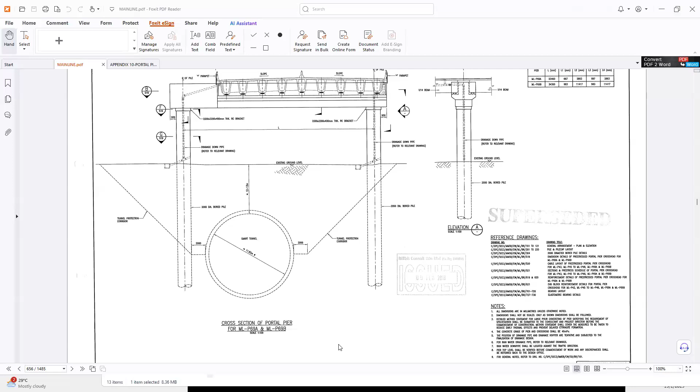I just want to share my screen. Is my screen visible to everyone? Yes, yes. Okay, nothing to talk about me. Everything was explained by Dr. Krishna, and Janarul is one of my best friends. He invited me to share some real-time industrial problems, whatever we do in the design, and my experience with all of you.

So I just want to start. Mainly, my scope of work is bridge design from top to bottom, meaning superstructures, substructures, and foundation. My talk today is not limited to only foundation, because I am a structural engineer. Geotechnical engineers do the soil analysis, give the soil parameters, and also do the pile design up to that. From above, meaning pile cap, substructure and all superstructure components, is done by structural engineers, me and my team.

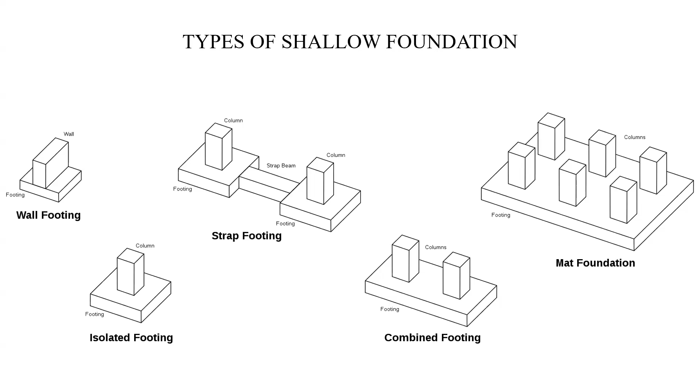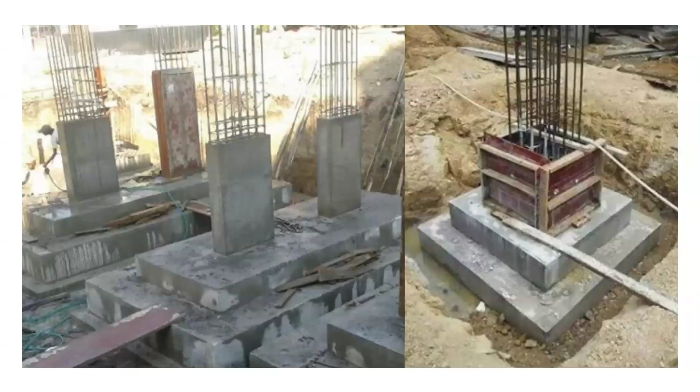But for the main structure, which bears the load from the vehicles and the bridge, mostly they go for deep foundation, mainly pile foundation, well foundation, or like that. I can't say this is less used. This is used mainly for buildings, and all those types of structures use this type of shallow foundation. This is a typical foundation. This is an example of combined footing, and on this side, isolated footing also.

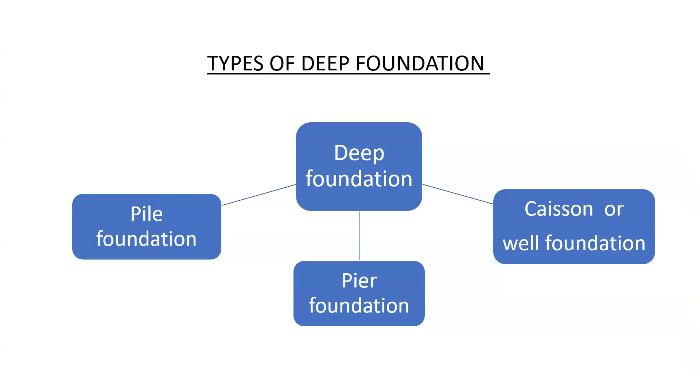So as I said, in deep foundation there are a few types: pier foundation, pile foundation, and well foundation also. This is mainly a well foundation on-site photo. The well foundation is mainly for long span bridges. Long span means nearly more than 100 meters; we consider that a long span bridge. In that type of bridge, when the pier carries a huge load, and also when the pier is in a water body, mainly a river or something like that, the well foundation is the preferable choice.

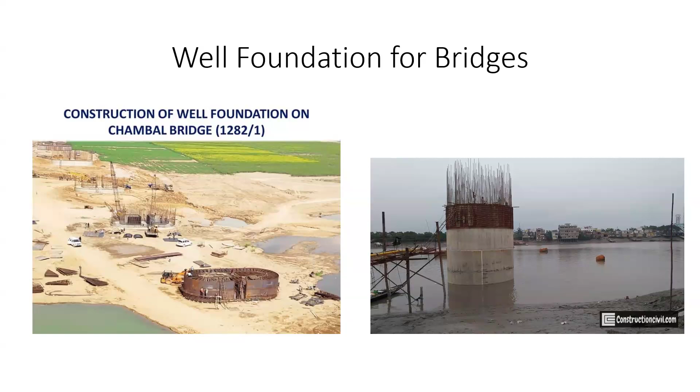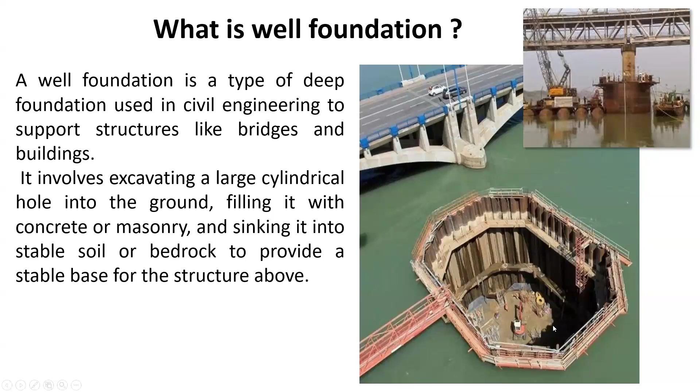This is one construction site photo of a well foundation. This is the top view from a water body. By the sheet pile, we protect the site from the water coming into it, so we can start work inside that area, preparing the site for starting the well foundation. This is the well foundation, the curb portion, which goes slowly deep into the soil. I go to the next slide.

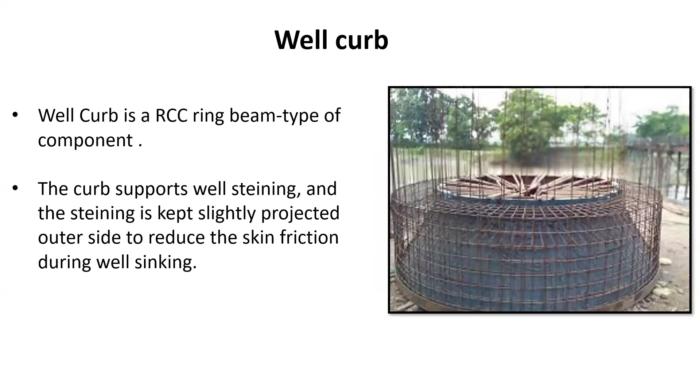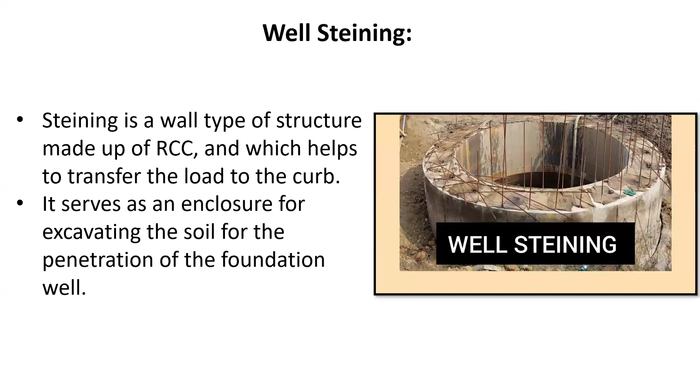Yeah, the bottom plug. This procedure keeps on repeating so that it goes to enough depth for the foundation. This well foundation easily goes 30 meters and more deep into the river. It is mainly on the water side, where we can't do the piling work, so we choose this well foundation. This is the casting of the bottom plug. When it goes down to the desired design depth, then we seal the bottom portion and then fill it up.

This type of well foundation is very costly, and only if it is very much required do we go for it. In my 15 years career, I have seen this well foundation only one or two times, because it is very costly. If it is a fast running water body and we cannot stop that water, only there do we prefer this type of foundation. Compared to the pile foundation it is costlier, so every contractor and everybody tries to avoid it; only for very big, long span bridges is this foundation used.

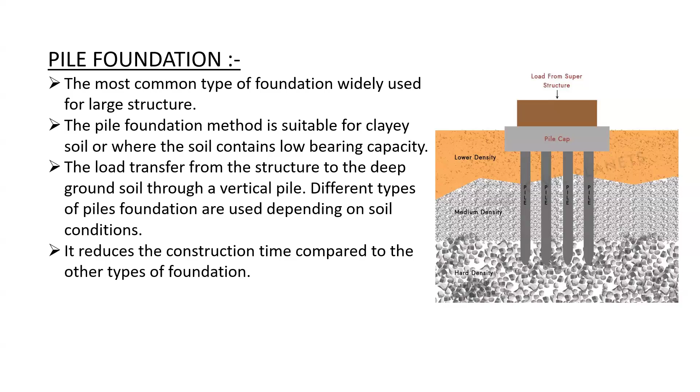Pile foundations come into play for high tension towers and other high rise structures which cannot be supported by open or shallow foundations. Pile foundation is the preferable option there. For electrical towers, they have uplift piles specially built and designed to take tension.

Pile is mainly of two types in terms of construction: bore pile and hammer driven pile. Bore pile can use various diameters, like 1 meter, 1.2 meter, but hammer driven pile diameter is less, nearly 400 to 500 diameter.

Pile foundation gives the structure capacity to take load. The pile transfers load to the ground by two methods: end bearing and friction. According to how much load is coming on the foundation, that determines how deep the pile goes. In some live projects we see pile lengths up to 23, 30 meters, which is quite common and works well at the site.

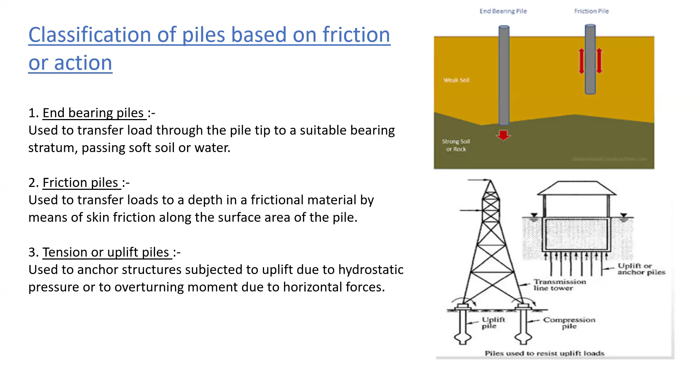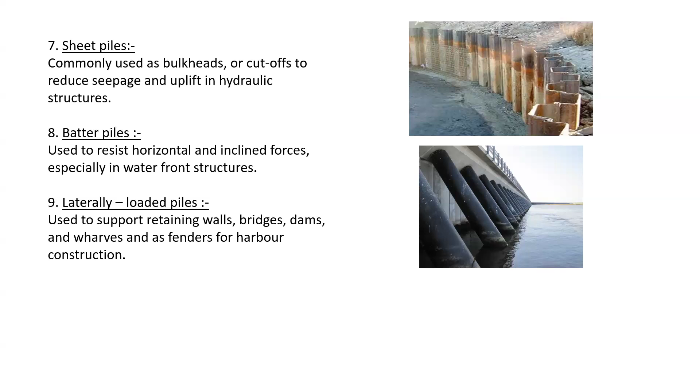There are also material-wise piles: timber piles and steel piles, though these are less used for main structures. Timber pile is quite common in soil improvement cases, slope stability, and ground work, and for ground protection. Some load bearing temporary structures also use timber pile, but infrastructure like bridges, metro, and railway always rely on concrete piles.

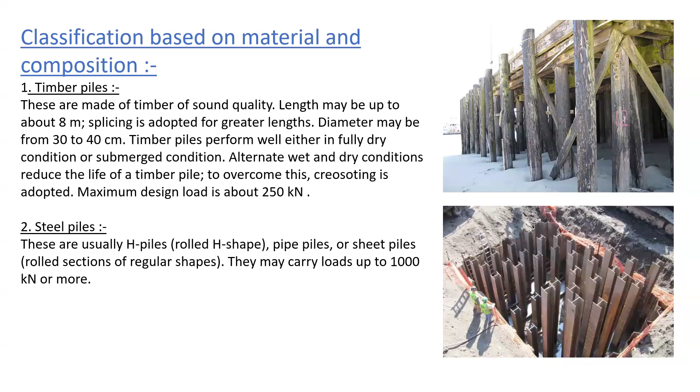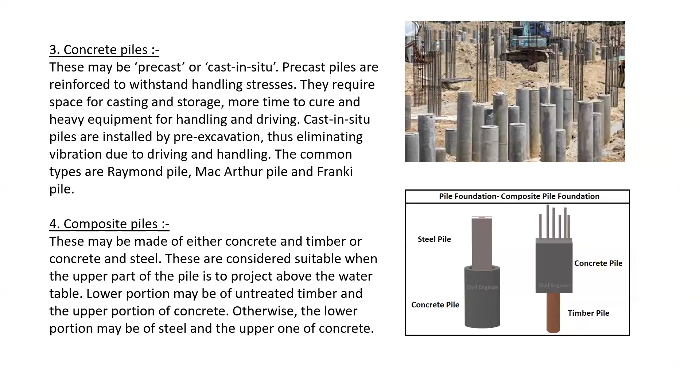Piling is done either by driven pile or cast-in-situ bore pile. In the majority of cases, cast-in-situ bore pile is preferred by contractors and sites. It has advantages: customization of pile diameter and length, and while drilling, it takes soil samples and updates soil parameters, so the geotechnical engineer can check whether the designed pile length is okay or needs modification according to live soil data. This is the most preferable and widely used option for pile foundation.

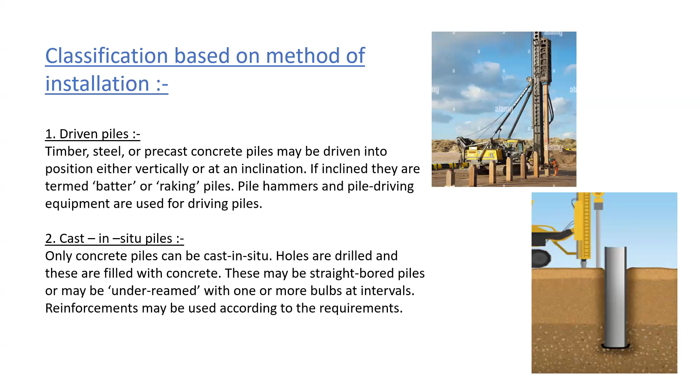Driven pile is also used in parallel, but it has some limitations. This is the typical step-by-step procedure for driven pile.

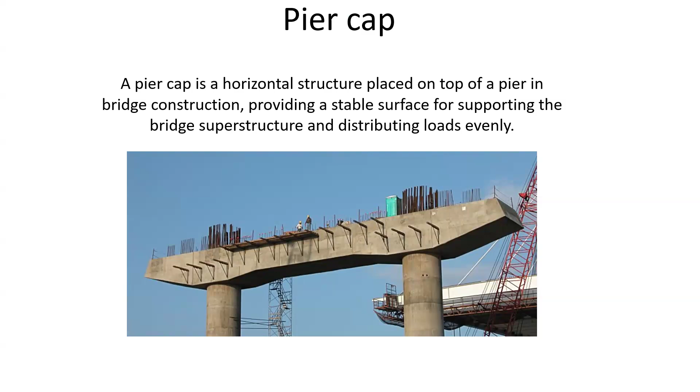This shows a halfway built structure site with pier and pier cap, and the structure ongoing. Now, other than this foundation part, let's move to the bridge part, bridge design, which is my main field of work.

This is a typical structure from top to bottom, taken from one of the metro rail projects, Chennai Metro Rail. At the top there are two U girders supporting the metro rail. Typical U girder span is 25 meters, maximum going up to 28 meters. Nowadays all metros prefer this U girder structure.

These U girders have a few advantages. Each span is built in pieces, two U girders per span, depending on the general arrangement of the metro railway. One span is precast, fully cast and stored at the yard, then brought to site where a crane launches it to complete one span. This is the preferable option for metro railway.

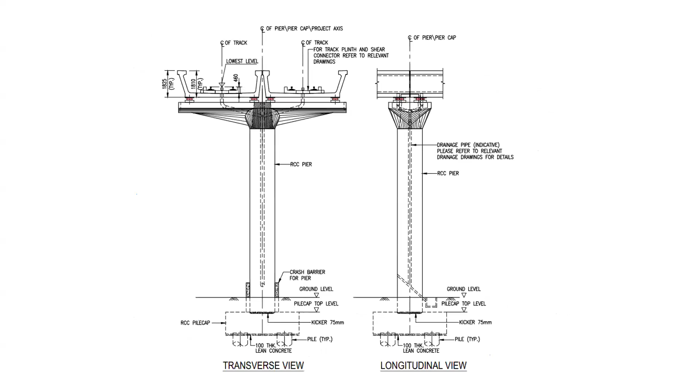This is for the highway bridge. For a highway bridge we cannot use directly the U girder, because as I previously mentioned, U girder is specially favorable and suitable for railway, since railway has one up and one down line with no crisscross requirement - very rarely does a train move from one line to another.

That is what we call crossover, and only that area needs special design. But most metro railway goes parallelly, one up and one down, which is very suitable for this type of girder. But this cannot be used for highway, because highway cars need to move from left to right and right to left, and it needs a flat carriageway.

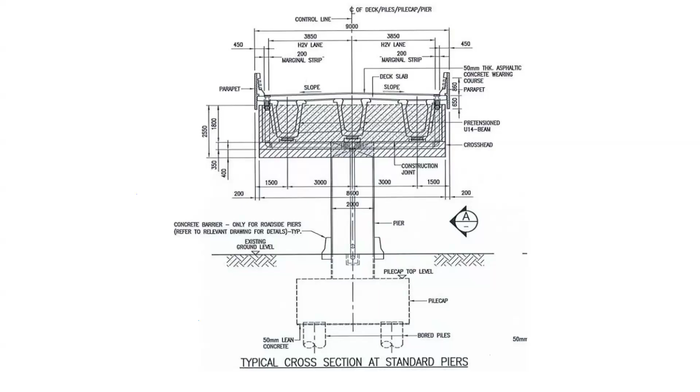In Malaysia, most road highway bridges and elevated expressways use this type of U14 precast beam over slab, and also pile cap and pier, same way, cast at the site. Pier cap is precast, and also the U14 beam is prefabricated precast, which just comes and is launched. Then only the slab needs to be cast at the site.

Some typical highway bridge flyovers are like this, very wide - one lane, there are two lanes for down and two lanes for up, and the total width is nearly 24 meters and above. So this uses a number of U14 beams, but it is still on a single pier. But the pier cap is so wide it cannot be precast in a single piece.

So that time they have to prefer the segmental approach. Here it is 5 segments for the pier cap, and then beam and slab. This type of design is very iconic, because a single pier supporting such a wide bridge is really, really very rare.

Okay, other than the conventional and straightforward design, which is pile foundation, pile cap, pier, pier cap, and all the girders, there is some complication that comes from the site. As designers, we cannot avoid those types of complications - we have to take those complications and give the solution.

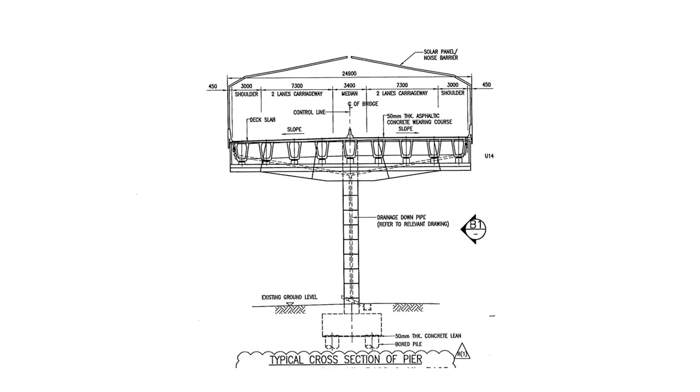So we don't easily go for this complication. Other than the cost of this individual pier, the pier cap also costs extra involving shuttering. These type of structures usually have a number of repetitions, so they construct a mold that can be used multiple times, making construction easier and repetition work faster. But when this type of structure comes into play as a single piece, the mold preparation and design becomes only for one pier, so everything costs high to the project.

This type of difficulty arises because every site doesn't have clear land to put a straight, simple, repetitive design. In a crowded city, when we try to build a new flyover, highway, connecting highway, or metro railway, there will definitely be some obstruction. We have to solve this from a structural and designer's point of view, giving a solution for how they can construct it at the site. So this type of irregular structure comes into play, and we have to encounter it like that.

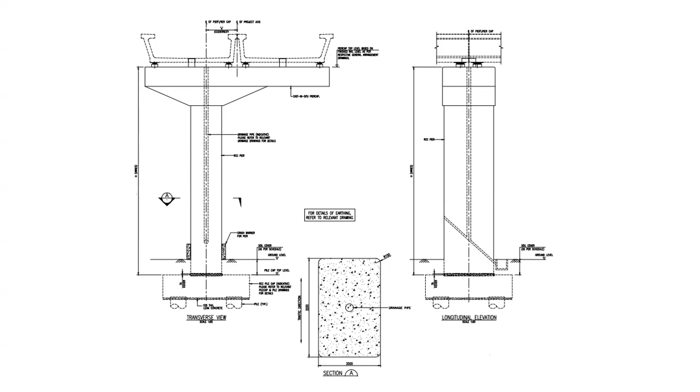This is the simple eccentric pier. Next, this one is for the metro railway. Sometimes it's called an extended pier cap. What is that?

We earlier said the U girder used for railway cannot be longer than 25 meters, or in some cases 28 meters. For each project, they prepare the mold and casting procedure such that the U girder is designed for one optimum length. For some projects that's 25 meters, for others 28 meters, but it's fixed for that project. So all U girders are maximum up to that length. But in some places, the pier cannot be placed within 25 meters - there's a need for an elongated gap, meaning 26 or 27 meters, then again 27 meters, then 25 meters resumes. So for those two spans of 27 meters each, the U girder cannot fit, as the standard maximum length is 25 meters.

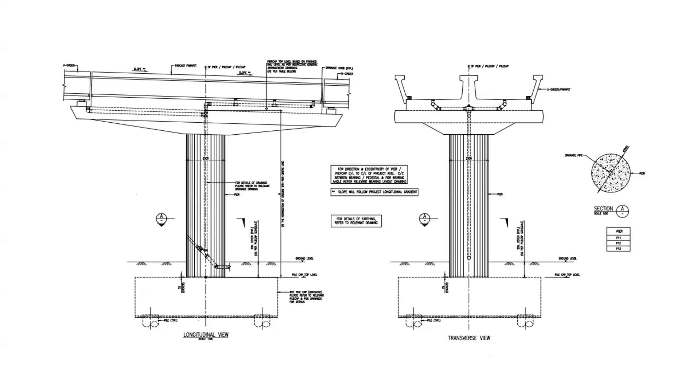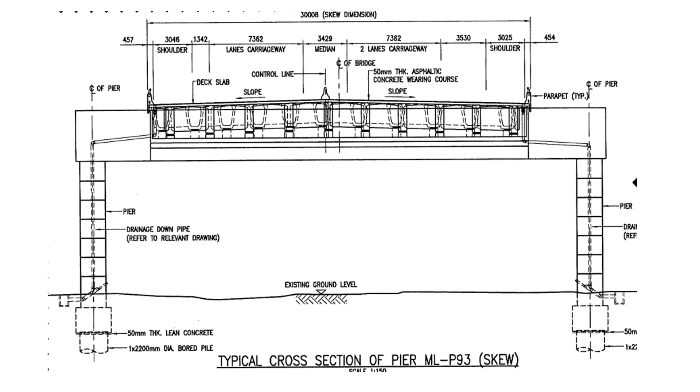Then there's the portal - very common and simple, used when there's no place in the middle of the road to put a pier. This is the most common simple portal, with a portal pier on both sides supported by pile foundation. But even this type of simple portal is not always possible in some complicated and crowded areas where utilities are present, like this.

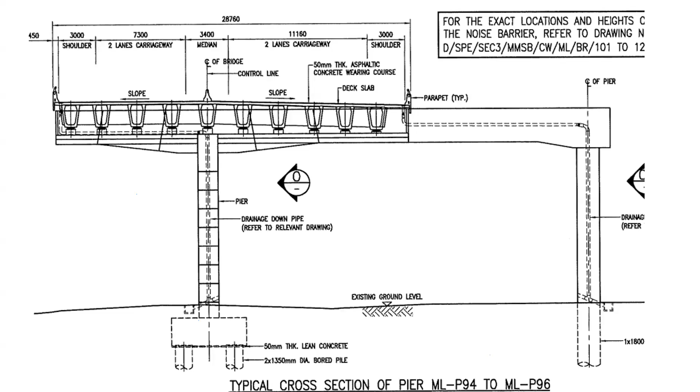Here, at the far end there is only one pile going up to support it, because the far end will have very less load. At the central portion there will be much vertical load, but individually it cannot support this unbalanced load. If it becomes a single pier, there will be huge moment that cannot be supported by a single pier. So the secondary leg that makes it a portal is required, even though it bears very little vertical load. Because of this portal action, the bending moment at the center of the pier is greatly reduced, and that's how we design for unbalanced carriageways with two legs. This is one type of portal.

This is also, you can say, a portal, but the thing is that there is one central carriageway which can be borne by the single pier, but there is another ramp coming, and that is not at the same level, because as we design for the highway, there is also a level requirement. If it is going down or going up, we cannot make it the same level as we wish, because some of the roads go slowly down and merge with the at-grade level, and some of the flyovers go up to cross some railway or some other road, then go down.

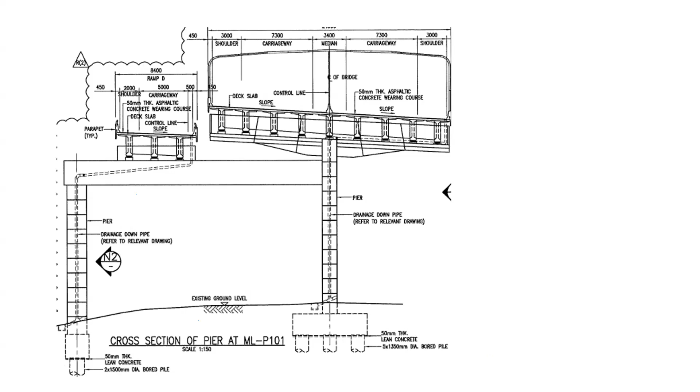So level plays one of the important roles. If the level is not matching, then we have no choice but to build this type of complicated and funny type of structure. But this is the most optimum way. If we try to make the two levels the same, that will be very difficult further along, because one of the carriage ramps is going down and another highway is going up, so we have to maintain the level. So this type of funny structure comes into play in the design.

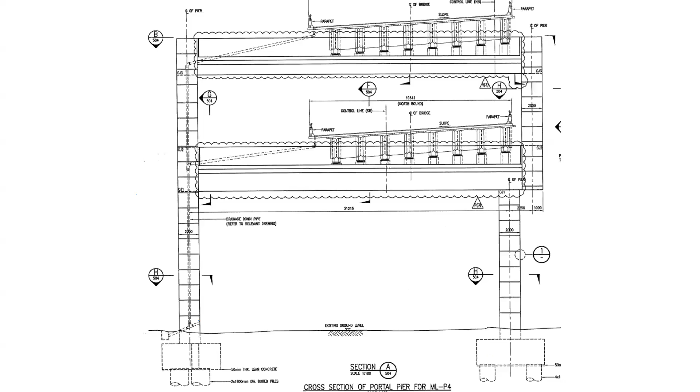This looks like the expected simple way, but still, like the previous one, on the right side there is a requirement that the deck width needs to be so much, so the pier cannot continue from top to bottom; it needs to be shifted by some 2 meters or something like that, which leads to a non-symmetric load distribution. This type of structure comes in some projects, and from our design point of view, whatever moments and loads are coming, we have to satisfy and check the design and provide it for the construction.

Okay, this is also the structure from the construction point of view. This is not all constructed at the site. Some of the requirement is to make it fast, and as said earlier, this type of flyover we don't build at a vacant site. The busiest road of the city needs to be replaced by the new connecting flyover. So the ground is expected not to be empty; it is a busy street or full of utilities. So the construction of the portal cannot be done in such a way that the site will be blocked.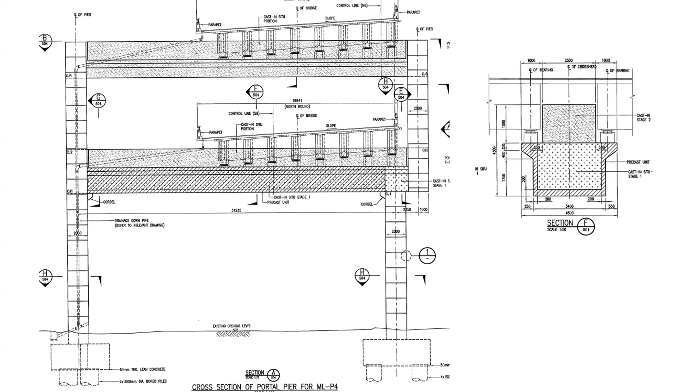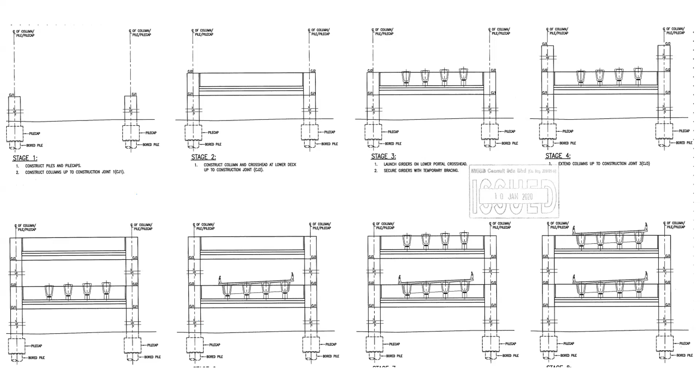So this level of the portal is precast, as seen at section F. You can see the U type portion is precast, brought and put there, then filled up with concrete in a second stage, and a later stage builds the portal pier cap, then the beams are put and the structure continues. This is shown here step by step, how the double deck portal is built. First the pile cap and pier up to the first level, then bring the precast one, put it and cast the filling, then place the beams of the first level, then the column goes up to the second level, then the second level is built, and so on.

Something we have to provide for the contractor: when it is not symmetrical, the first level will be cast with temporary support, and once the first level is completed, then go for the second level. This is stage by stage how the portal is built at the site.

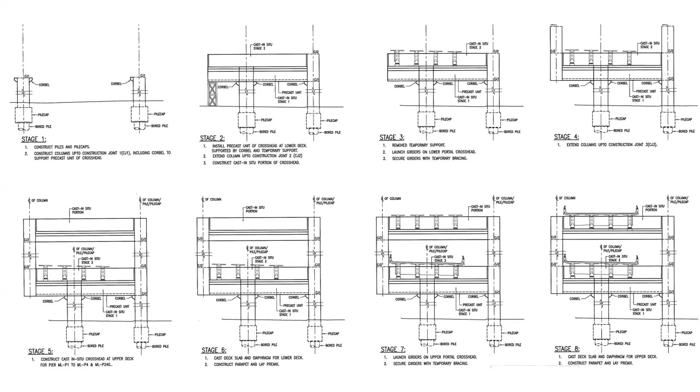Okay, we discussed the various types of portal supported by the pile foundation. Some more complication comes into play when the portal needs to be built over a ground. Under the ground there is a tunnel called the SMART tunnel, which flushes out the rainwater and all those things.

And this tunnel was constructed long before, and we cannot touch the tunnel portion. It comes under the sewage, water supply, drainage authority, and the higher authority wants to build the new flyover exactly where the tunnel is. Below the ground, 12 and 13 meters below, there is the tunnel, and we cannot disturb it because it is functioning for the wastewater. So when we go for the portal and pile option, there is some restriction.

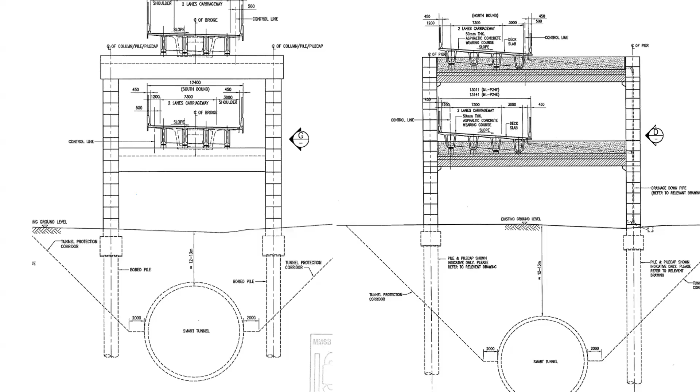Another thing: a double decker structure, but we don't have space for the portal. The top one is supported by two columns side by side, and from the lower level it becomes a single pier option. This option we call a lollipop pier or lollipop structure, which is two levels of roadway supported at the bottom by a single pier.

The same type of structure we tried to build at the side, but some site issues came up, with one highway at the top and one at the bottom, and we cannot place the pier exactly at the center. So at the side one more pier is required, so it becomes a portal. This is one I have seen in Malaysia. In lots of places they use this type of lollipop structure, a two-level flyover but not a portal. At the ground it is a single pier.

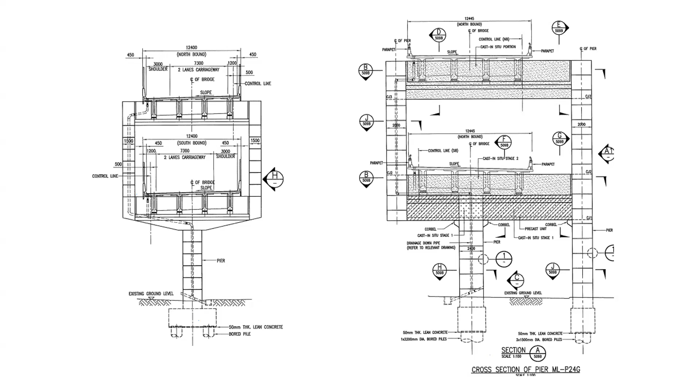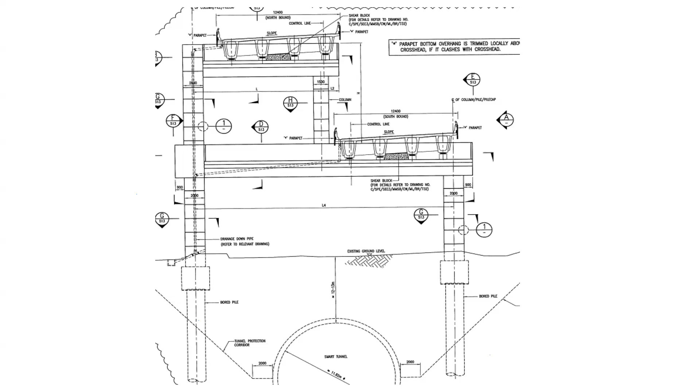This is also at the SMART tunnel area, with two levels of viaduct at different levels. So it's like a small portal over the bigger main portal. This type of structure is built because we cannot easily put one more pier in the middle, since there is the SMART tunnel, so we have to avoid the SMART tunnel area. So the first level pier cap becomes very heavy because at the middle it supports another small pier which supports the upper level of the viaduct.

This is one of the designs I did. You can see there is only one row of piles placed. Don't consider this a single pile. This is the cross section view. There is one row of piles, with 3 or 5 piles, I can't remember exactly. This is the pile center line and pier center line.

There is some difference. There is eccentricity because on this side there is the SMART tunnel and on the other side some electrical or water pipe is coming. So we cannot place the pile exactly at the center of the pier. For this, a huge moment comes when we design the pile cap, because the pile center line and pier center line are not the same line. It looks like a very common, easy structure, but somehow there is some twist.

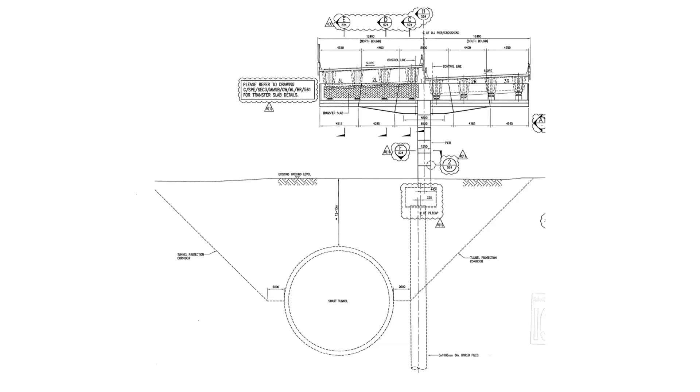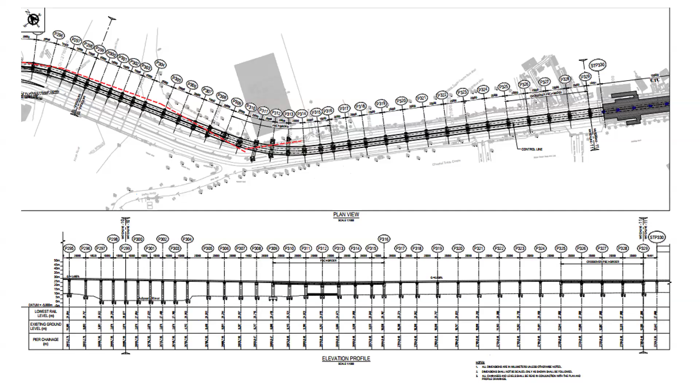It is very challenging to place the pier location, and you get complicated portals with legs not at the middle but in some eccentric way. This is a typical abutment type: when the roadway comes flush to the ground, this type of abutment structure is required, which is supported by one row of piles, and after that the traffic goes to the ground.

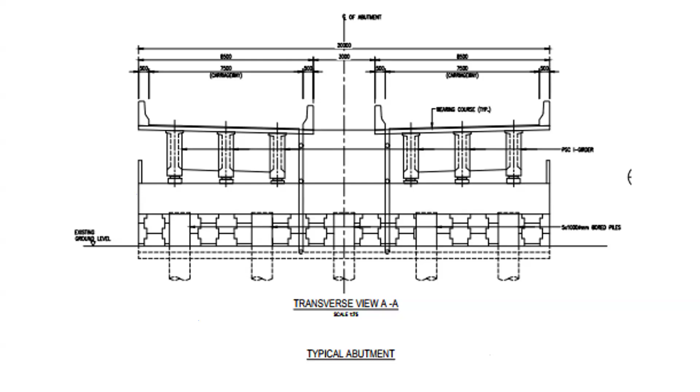This is the transverse view of that abutment. You can see on the left side the bridge beam supporting on the abutment, and loads go to the pile. After that the approach slab and retaining wall, then the fill-up work and ramp, then traffic goes onto the ground.

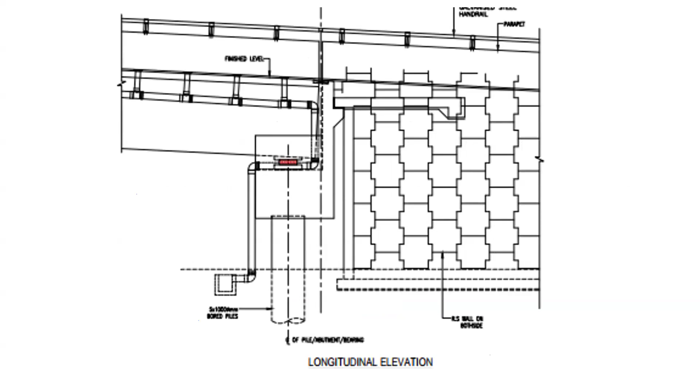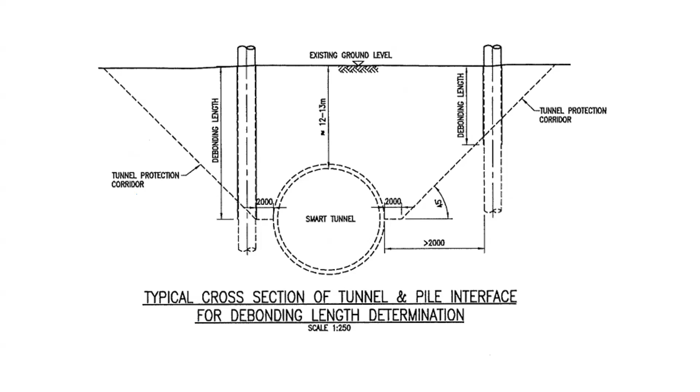This is the typical challenge I told you about, the SMART tunnel. We have to provide a debonding length to the pile, so that the pile does not transfer load to the soil above the SMART tunnel, which load would come back to the tunnel and may disturb it. This type of solution is provided by our geotechnical engineer, so that we satisfy the requirements of the owner of the SMART tunnel, so we are allowed to build around the SMART tunnel without disturbing it, and we can construct the new highway infrastructure.

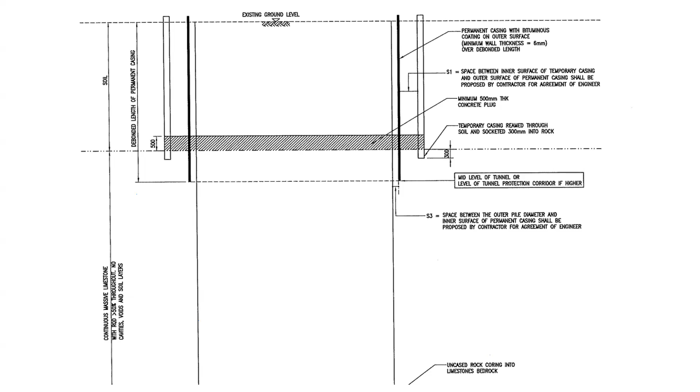This I just discussed about all the above substructures. Now come to the foundation. When I say foundation, two things make up the foundation: pile and pile cap. This is a typical 4 pile, 5 pile or 2 pile cap, very regular shape and size. This is what we ideally design for all the structures.

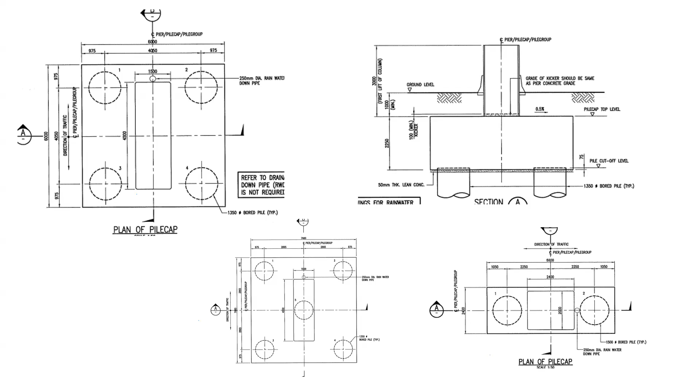First point, our priority will be that every pile and pile cap is regular and evenly distributes all the load coming from the superstructure, substructure, and pier to the pile cap, evenly to all the piles. This is the first choice of a designer for this type of foundation. But the situation, location, some utilities and some congestion at the site force us to go for an asymmetric one.

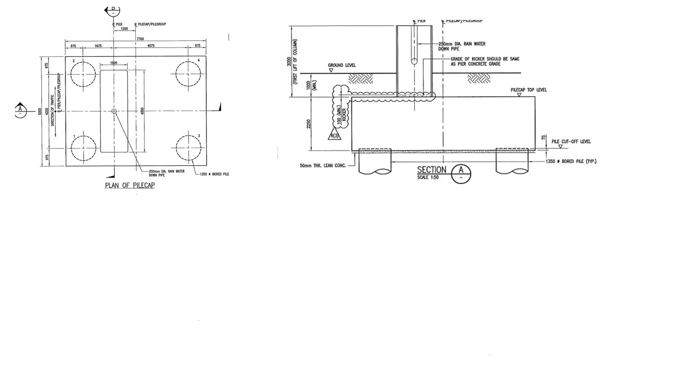First of all, like this, we have 4 piles, but the pier is not at the center. It is towards 2 piles. This will lead to 2 piles being more loaded and the other 2 piles very less loaded. Irregular shape. This is quite common when so many utilities cannot be seen during the survey.

When the contractor comes and tries to dig for the piling, only then they find inside the buried soil there is some water pipe, some high voltage electricity, some cable, optical fiber, something like that. Wastewater drainage and water drainage can easily be found. It is under these, so we can avoid them. But still, in the survey some things get missed, and when we go to the site, we find there is difficulty to do the regular pile cap.

So some of the rectangular 4 pile groups become a rhombus or trapezoid like that. This is the irregular pile group. When this type of pile group comes, checking the pile cap will be very difficult. First of all, the load coming from the pier to the 4 piles is not equal. It has to be calculated with rivet theory, or some geotechnical engineers use Plaxis and other software to calculate the load distribution among the 4 piles.

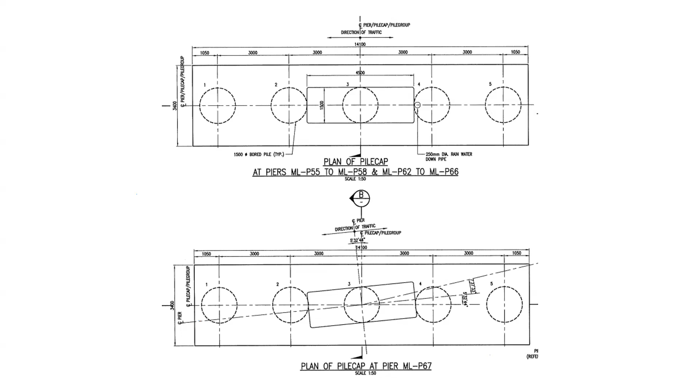You can see the top one is the regular 5 pile group supporting one column. But in the second one, we cannot place the 5 piles on the line of the pier. There is some deviation, some skewness, some angle. So when we calculate from the superstructure load, there will be one longitudinal moment and one transverse moment. All need to be factored with this angle and checked properly, because not all the piles are in the same direction as the traffic. There is some deviation due to site constraints.

Same way, there is something which cannot lead to a regular 5 pile group. This irregularity of this type of pile cap comes to us very frequently when site construction is going on. So with very limited time, we have to check and give a feasible solution for the location. Sometimes it is not for the utility.

At site, while boring the pile halfway, the bore cutter which cuts the soil gets stuck halfway, cannot be moved out, cannot go deeper. In that situation we have no choice other than to leave the pile location. At that time we also go for an alternative pile location to satisfy the foundation.

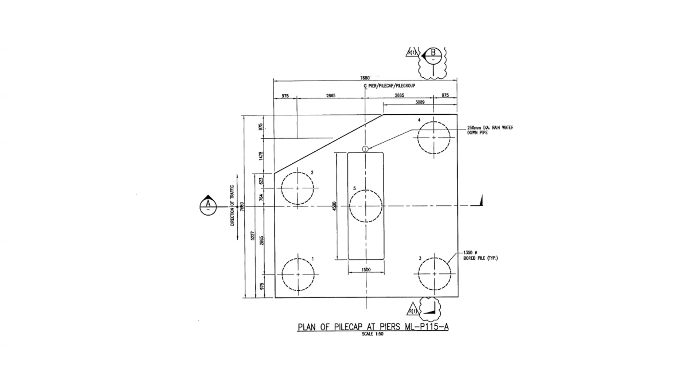Similarly, here we can see there is a pipe which cannot be avoided. So the contractor proposed that the pipe will be inside the pile cap and they can construct it. We checked whether a hollow in the pile cap would be satisfactory or not. We checked and proposed the same way, and they constructed it like that. The pile cap looks quite regular, but inside there is a non-structural pipe, which makes the pile cap hollow, and it should work under the working load.

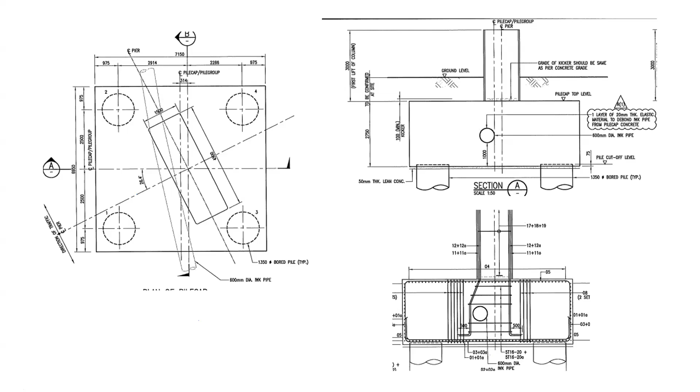This is one of the irregular piles, and this one also. You can see at first there are three piles, but the three-pile spacing is not equal because there is some utility or something there. So this type of uneven distribution leads to some piles having more load and some piles having less load, but for the requirement we have to do it.

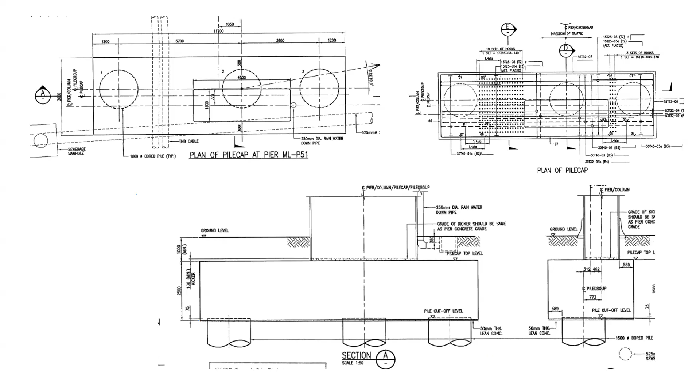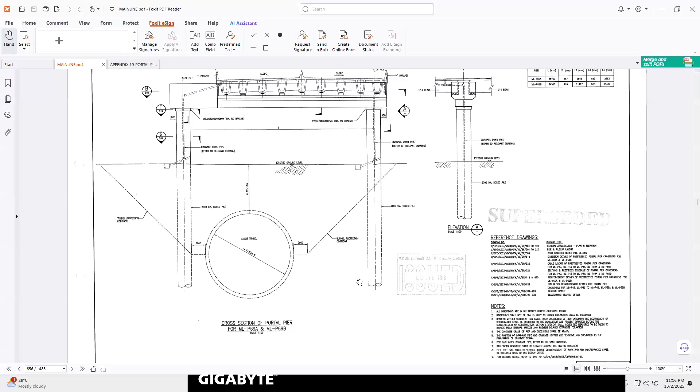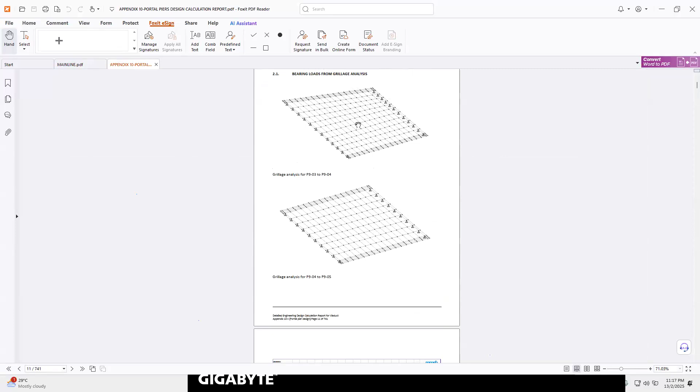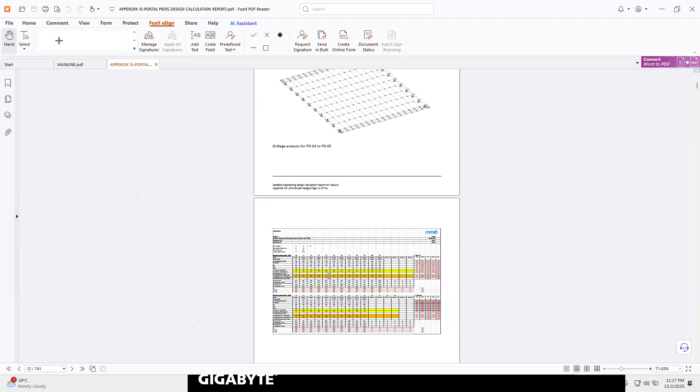Okay, this is how many varieties of structure we have discussed, but how do we calculate? We want to see some of the things. When we design the bridge, the design starts from the grillage of the superstructure, meaning beam, slab and parapet, and above that some traffic load will go on. This type of grillage structure we do in STAAD.Pro, and at the bearing location we put the pin support, and from that, for the superstructure, we calculate the bearing reaction for the dead load, the self weight of the beam and slab together, and

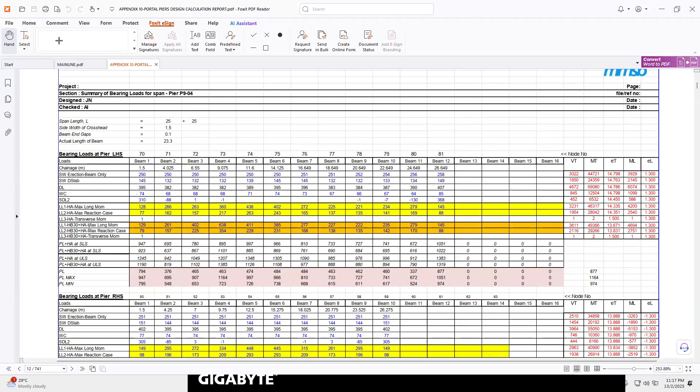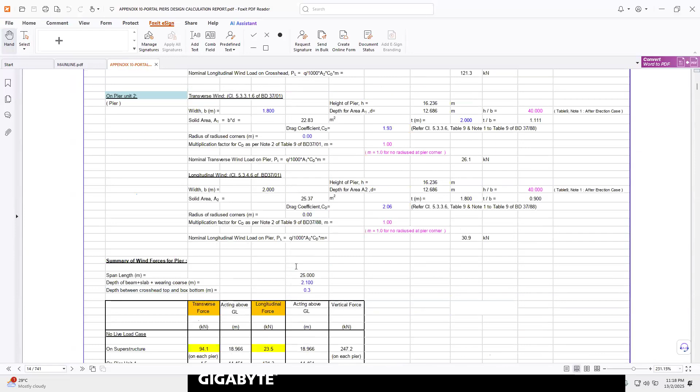SIDL, which is nothing but the wearing course, the layer of bituminous surfacing above the concrete slab, as on any flyover everybody can see, and the parapet weight. This is all SIDL, and then live load. Those are all the bearing reactions from one span on the left side and one span on the right side. This is the bearing reaction we extract from STAAD.Pro. Then another thing, we need to calculate the wind load as per BS, and for all the structure, whatever wind force is acting, we calculate that.

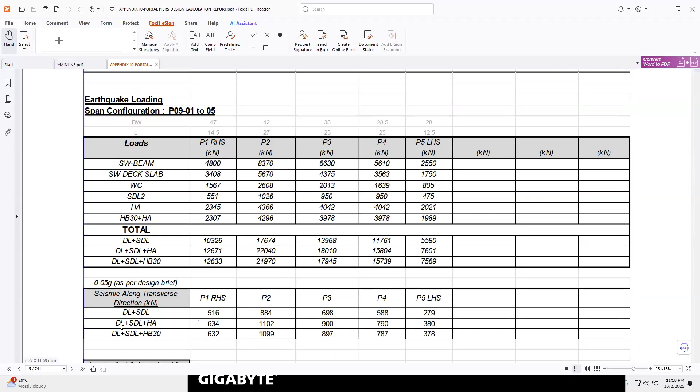And for the seismic, in Malaysia there is quite a straightforward seismic option. There is 0.05g as per design. In India, for this factor we have to do a lot of calculation, and here, with dead load, SIDL and live load with 5%, what the seismic load will be we can easily estimate here.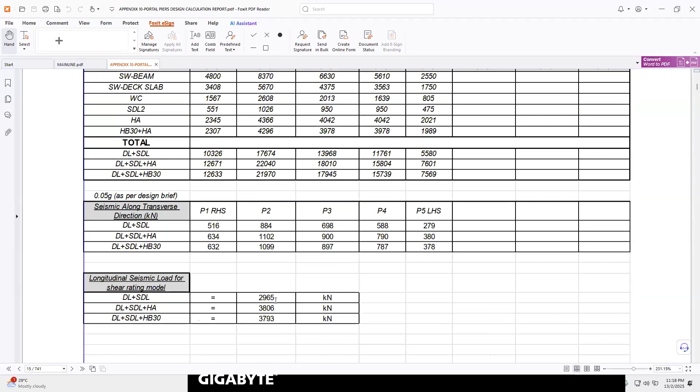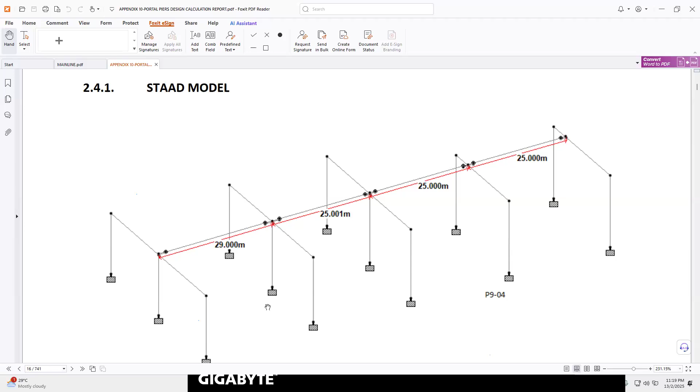And here, in the bridge structure, there is one type of portal, three-legged portal, two-legged portal, in series, connected with the beams from one span to another span. So the longitudinal load, like when a car brakes, this longitudinal braking force comes to the structure; it doesn't only come to a single pier, it will distribute over a few piers. There will be connectivity between one span and another with a link slab, but there will be some movement joints. So from movement joint to movement joint, these longitudinal loads will be distributed. Not only the braking force, but also seismic longitudinal force, longitudinal wind force, creep and shrinkage, all those forces will distribute over a few spans.

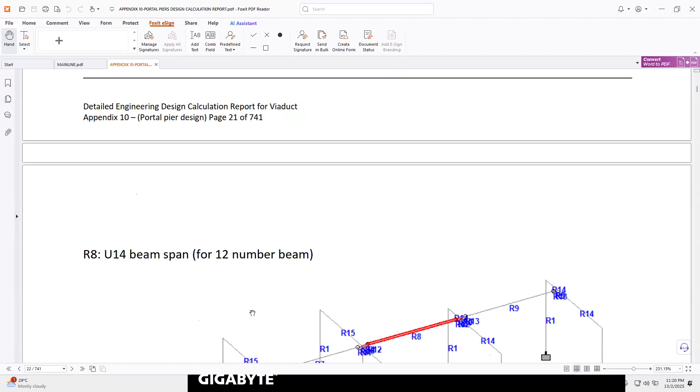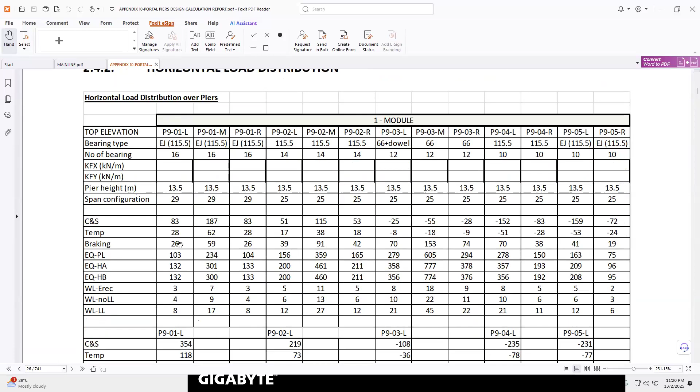For this analysis, this type of model we do in STAAD.Pro, all those longitudinal forces are applied and distributed over the few piers, and the result comes as some horizontal distribution like this. At one of the piers there will be creep and shrinkage, temperature, braking, earthquake with permanent load, earthquake with HA load, HB load, wind load at erection condition, wind load with no live load, and wind load with live load, all distributed over a few piers this way.

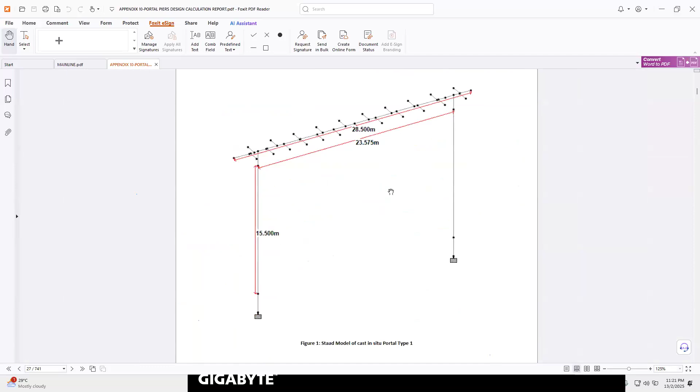After this, the longitudinal force we calculated, as well as the bearing load from the grillage analysis, is applied into the portal model at the bearing locations and the portal is analysed. Then we design the pier crosshead, and from the supports we get the foundation load, how much load will come at one foundation.

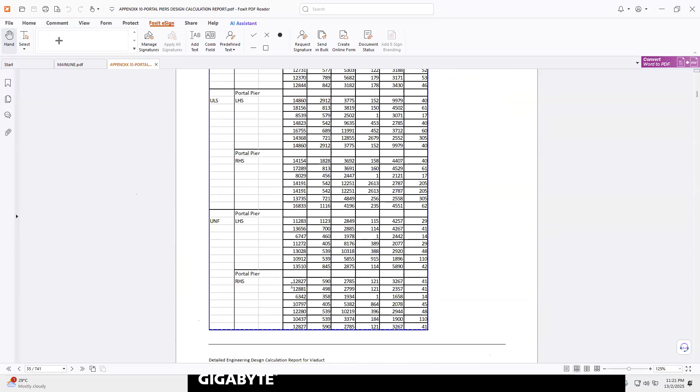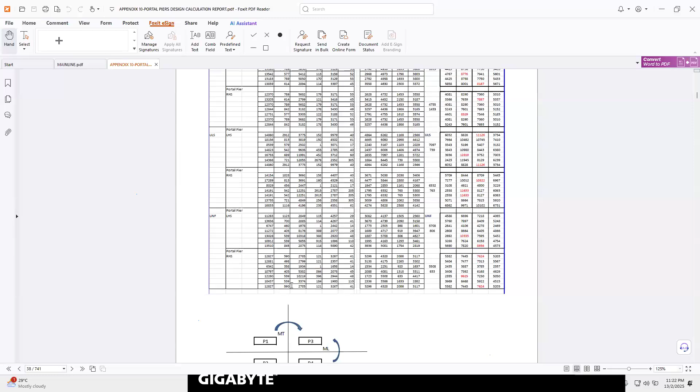This is the boundary condition, and this is one type of foundation load finalized for the SLS case, ULS case, and unfactored case. It is required for pile capacity and all those things. So we prepare the foundation load for these three cases, and this is given to the geotechnical engineer to check the pile capacity, and then they give back the pile reactions. Then from that load we check the pile cap design.

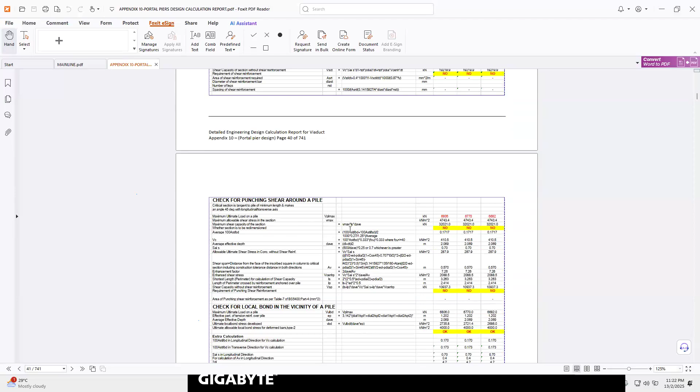There are a few calculations as per code: ULS check, SLS check, punching shear check; all those are carried out, and the finalized reinforcement is provided in the drawing. Accordingly, the contractor will start the casting and all those things.

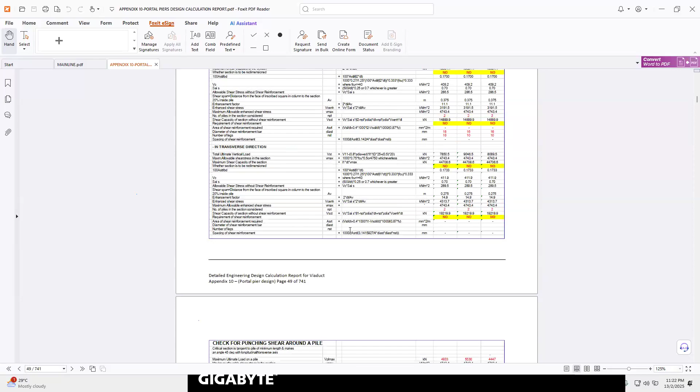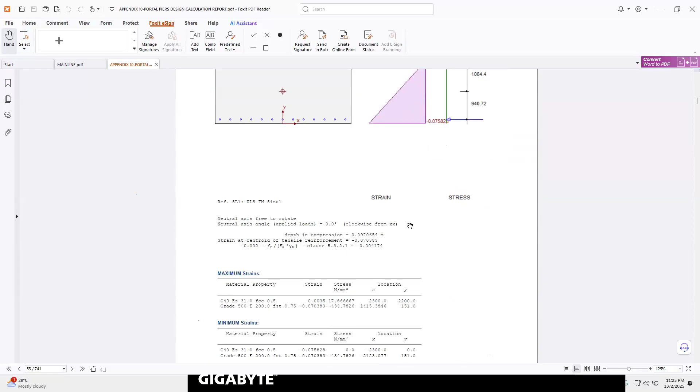This is one of our structural software. Other than STAAD.Pro, this is SAM, for checking the section capacity. This is the SAM output when we check the section with our software. And we also have an in-house spreadsheet that is widely used for checking all the capacities of the pile cap.

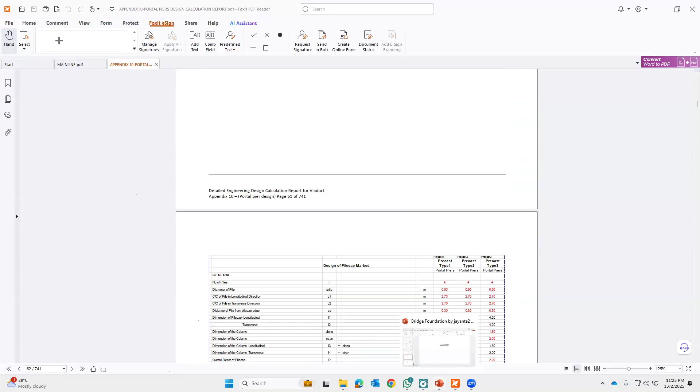That is the very brief way to do the calculation. That's all, any question anybody overall can ask. I don't go into the deep of anything design, how moment is calculated, how CR is calculated - all those things can be found in code and books, that's a good way. But in an overall project, what are the problems and how we as a designer take decisions, we cannot say okay there is some pipe, you can ignore it, that much concrete is not required, you cut 2 bars and put it in concreting. Whenever anything is expected from us, we have to give the solution in a written report format, and as per code it is passing, it is adequate and it is not failing. We have to give that type of written certificate whenever we give any drawing, even if the shape is funny, it has to be structurally approved by the code. That is our target.

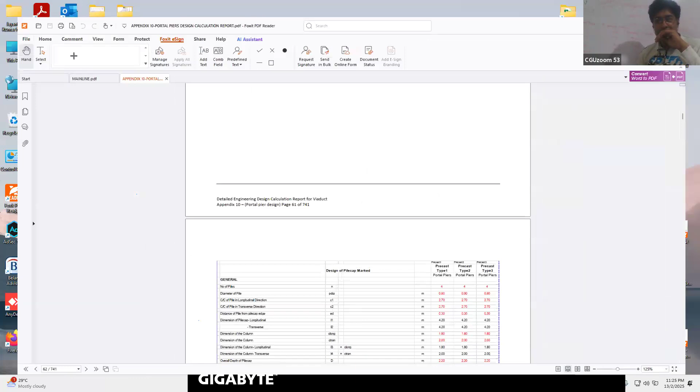Jayanta, thank you very much. Actually, what I can see is you are not only a senior bridge engineer, you are the bridge yourself between academia and real life construction of bridges. Jayanta, we love you. Your presentation was so resourceful and you dealt with practical cases from real life, in Chennai, in Malaysia. So you are wonderful and magical. You will be a very big speaker someday, an expert speaker. This is just a start, I can see it, Jayanta. We love you, thank you.

Devmala Roy here. It was a very useful and resourceful session, and I really enjoyed the whole part. I couldn't join earlier, but I joined since the last 1 hour. It was a very useful topic, and I think the people who have joined have really gained some knowledge out of it. Thank you.

Thank you, Devmala, great, Jayanta, really great. I didn't go anywhere, constantly I was sitting and listening to you, my dear. You are so good because I can see real life projects, so I'm getting interest. That is what you actually need to do as an industry expert - showing the connection between theory and field life or field cases. So you did that job very nicely. Very good, wonderful, thank you.